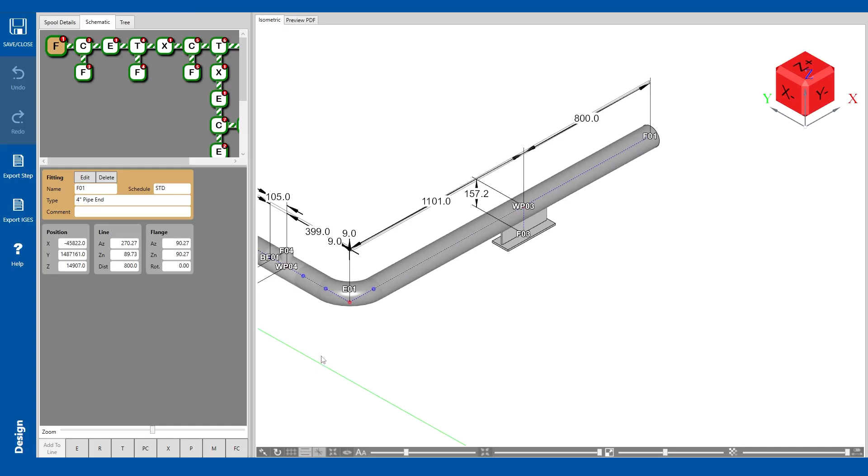We have changed the way supports work in the latest version of automet. This video will explain how to input and survey different types of supports.

When in Design Input, we can add a support by right-clicking and adding a pipe connection. Edit your connection and change the drop-down here to Support. We can choose between plate, box, and cylinder here.

We'll start with plate. The line and branch geometry has not changed, and as usual, we can add distance from the pipe connection here. The support length can be changed here, and the direction here. This is where we edit the plate dimensions. And here is our support plate.

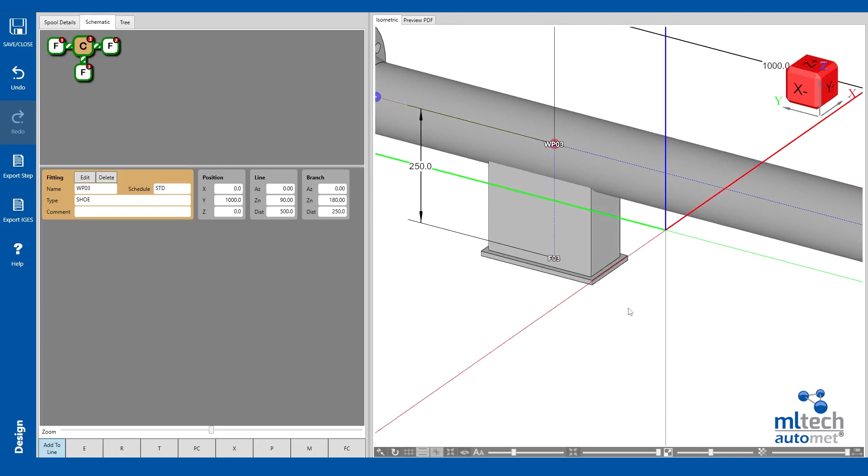Let's run through changing this to a box support. Edit the fitting and change the drop-down. And now we have a box support. As usual, if you need to change the dimensions of the support, edit the fitting.

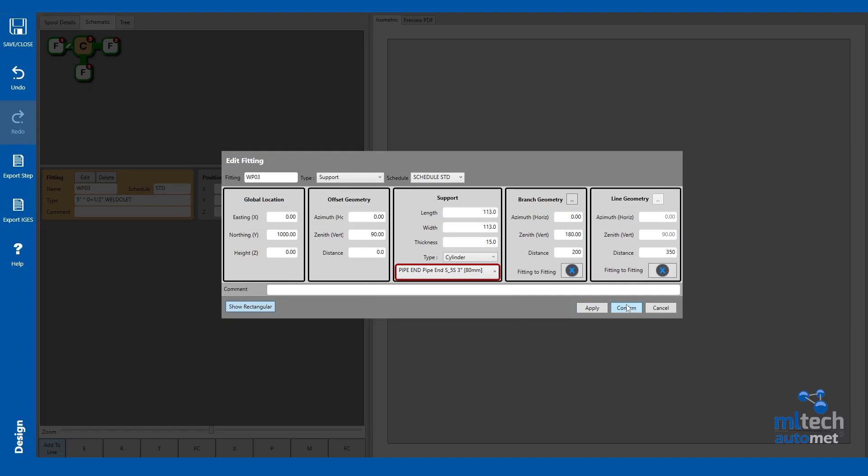The cylinder is the part that is the most different to previous automet versions. Select cylinder from the drop-down and you will see a new drop-down box appear. Here you can select the specification of your cylinder. And here is your cylinder pipe support. If you have a cylinder pipe support without a plate at the end, you should add a stub-in.

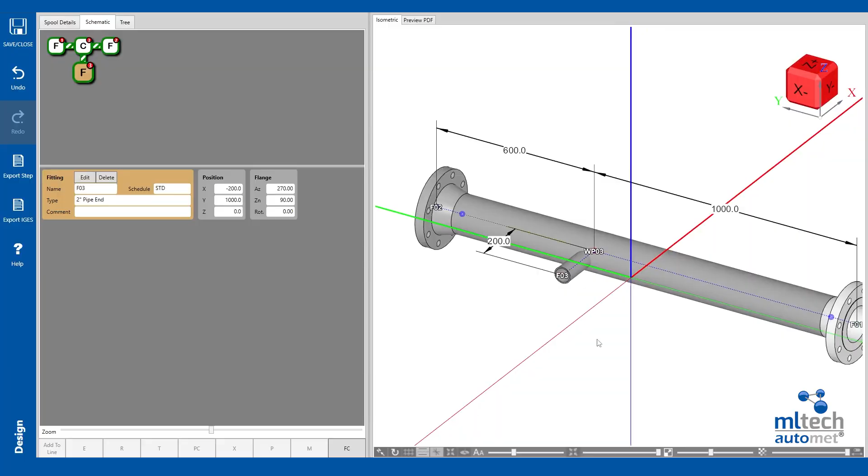So that's how to create supports in Design Input. Let's now look at how to survey them. The method that will provide the most accurate answer within automet is to survey 5 points on the bottom of the plate. These points, also known as edge points, include 2 along one of the longer sides, and then 1 on each of the other 3 sides, making a total of 5.

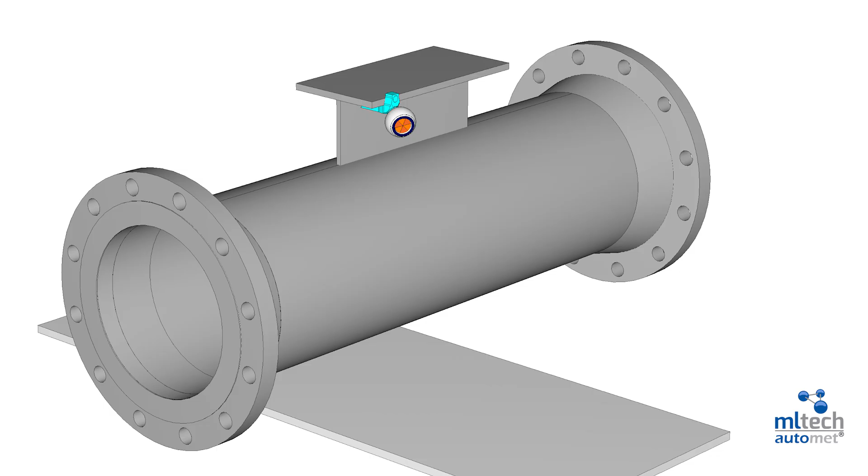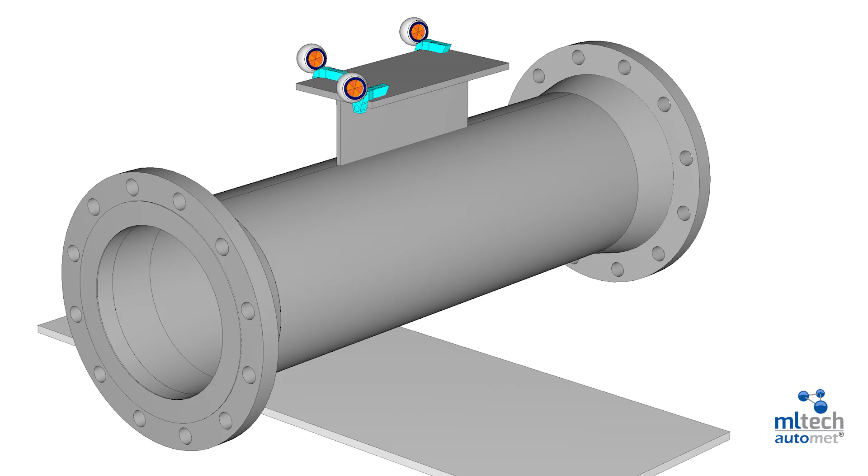Once this has been done, automet will expect a back point and a stop point as usual. Remember that the stop point is a single point on the opposite face to the edge points. The minimum number of edge points required in automet is 3, 2 along one of the longest sides and 1 on one of the sides adjacent to the long side. Importantly, you cannot have your single point be the one opposite to the side where you took the initial 2 points. These arrangements on screen will not work.

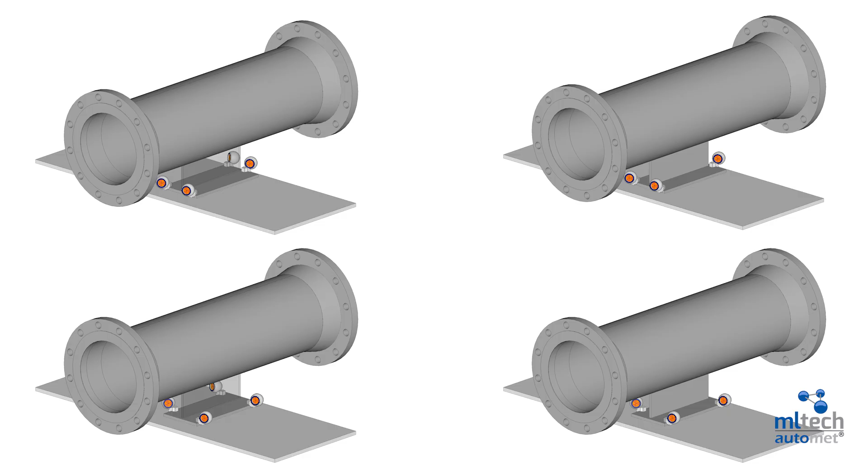If you're doing a site survey and can't get to the face of the base plate, you can take the edge points on the back face of the plate. In this case, the stop point is taken by placing the prism on the deck. The same rules for the edge points still apply. These orientations are not allowed.